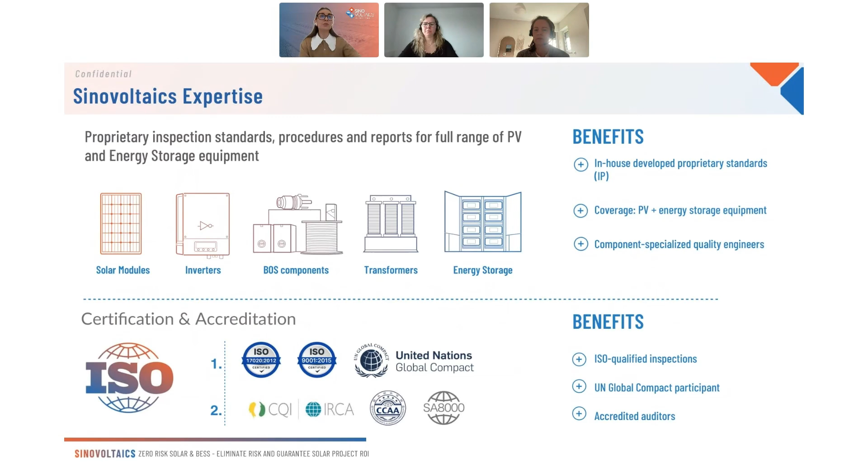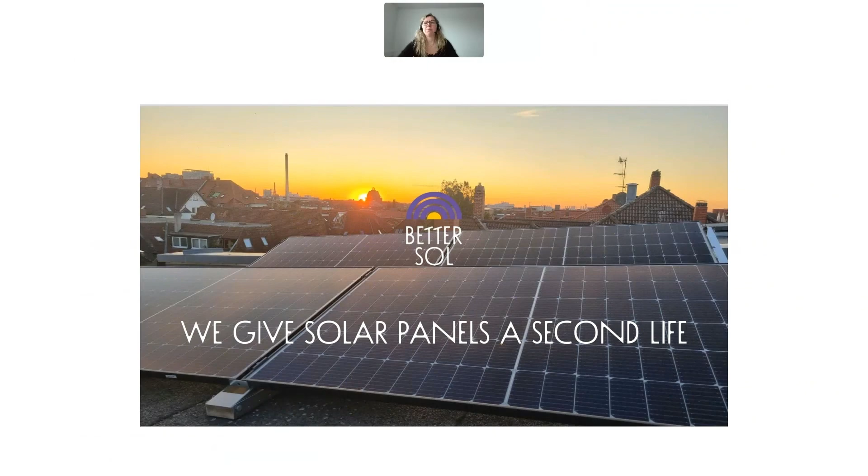Thank you very much. Hello, everyone. I'm delighted that you are here, and glad that I can share some information with you about Second Life. Even though I can't see you, I'm looking forward to seeing you.

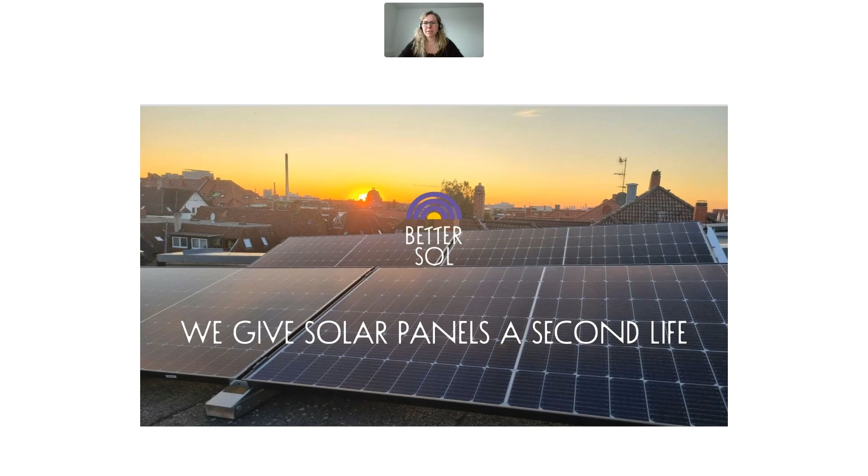My name is Franziska Ruff, and today I'm standing here for my colleague Luisa Schulze, who is responsible for the Better Sol brand and consequently the Second Life division at Solar Materials.

The energy transition is fully in swing, and the expansion of solar energy is growing exponentially. We all need this trend to create a future-proof world.

But what happens to solar panels at the end of their lifespan, or once the subsidy has expired? Solar Materials offers the solution here and closes the loop.

Decommissioned modules are sent to us in Magdeburg, where we inspect the solar modules disposed of by commercial operators. This allows us to separate functional solar modules from defective ones. Whilst defective modules are sent for recycling, we resell the functional ones as Second Life modules via our own online shop.

You might be surprised to learn that one in two solar panels is disposed of prematurely. According to studies by Irena and Circularity, half of the solar panels that are disposed of are actually still in working order and can be reused following an inspection or minor repairs.

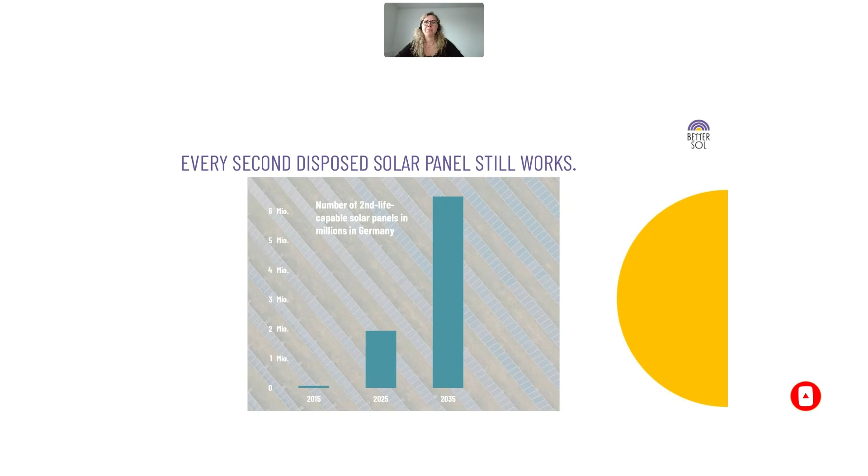At Better Sol, we aim to save still functional solar panels and the renewable energy they generate from premature disposal, thereby combining two essential drivers of the future: the circular economy and renewable energy.

In principle, all modules are suitable for testing, provided there are no known faults, such as glass breakage or defects on the backsheets. Any modules not suitable for reuse are recycled by Solar Materials, thereby recovering all valuable raw materials. My colleague Janet will tell you more about this in a moment.

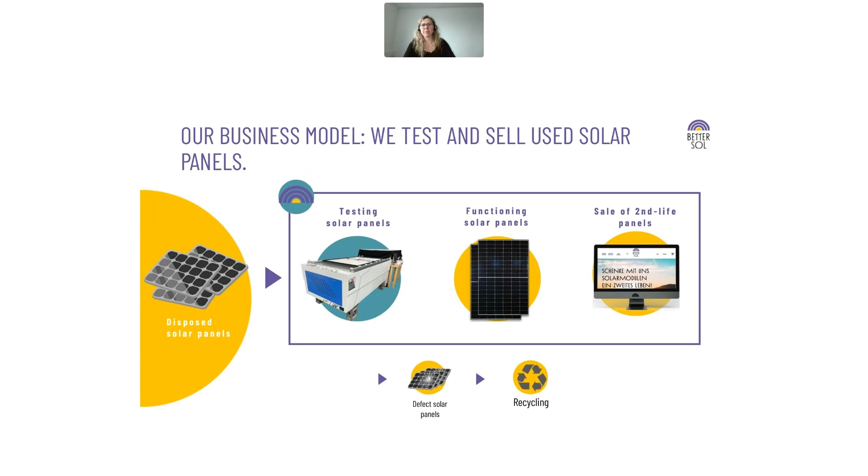We work with various recycling companies, solar farm operators, and resellers to purchase used solar modules. These companies work with us because, for the first time, they receive a refund for their still functional solar modules and thus avoid the recycling fee for such modules.

We collaborate with recyclers, IPPs, manufacturers, and resellers of new modules. Recyclers such as Reiling in Germany are delighted to be able to generate revenue from what was considered waste.

These companies work with us because, for the first time, they receive a refund for the solar panels that are still in working order, thereby avoiding the recycling fee for all such panels. Perhaps we will soon be able to turn the waste into a positive return as well.

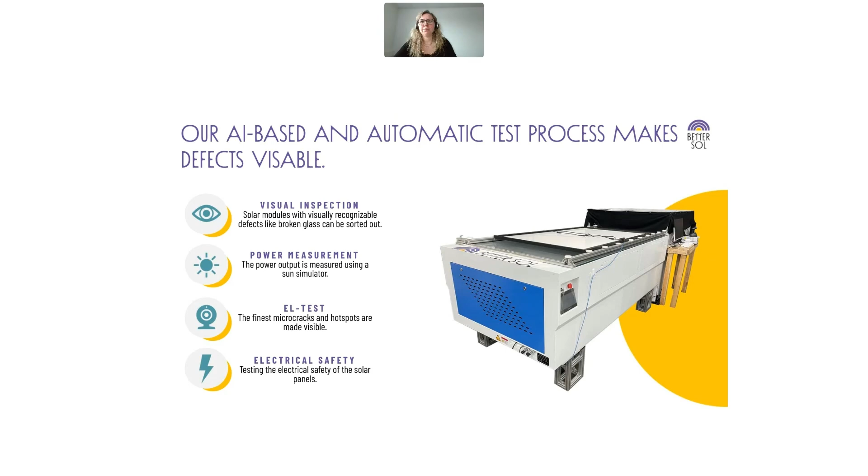Once inspected, our second life modules are sold via our online shop to B2B and B2C customers. Our modules are 30% cheaper than new modules offering the same performance. They are sold under the Better Sol brand, which is dedicated to selling inspected high-quality second life modules.

By reusing solar modules, we can offer a comprehensive end-of-life management service for used solar modules, comprising both recycling and reuse. Through reuse, we close the loop and act in accordance with the waste hierarchy. Critical and finite resources, such as silicon and silver in the solar modules, can thus be reused and are not lost.

Reuse can save more than 160 kilograms of CO2 equivalents per module. I hope these benefits impress you as much as they have impressed me.

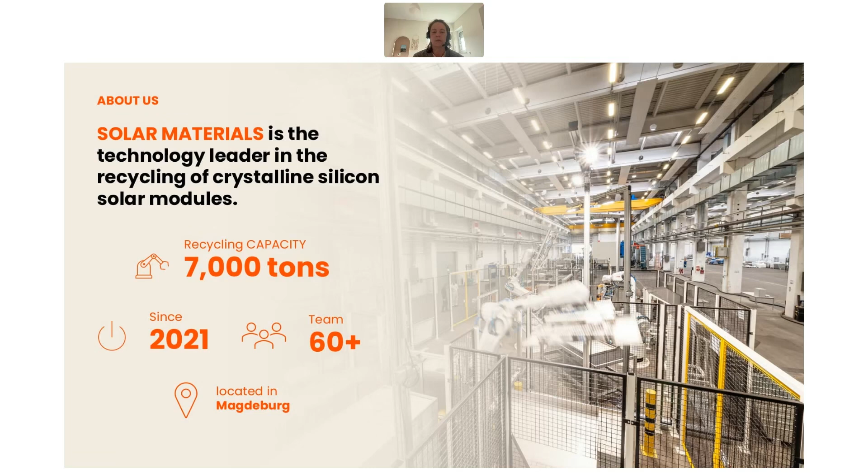We are now over 60 employees, and our capacity for the last year was 7,000 tons of PV modules we recycled. So we still grow. This is just the beginning of the Solar Materials recycling story.

So what kind of material do we recycle? Of course, PV modules. I think everyone is familiar with the typical layers of the module. The interesting fact is that around 95% of the installed modules right now are crystalline silicon solar modules. And how were they recycled up to now?

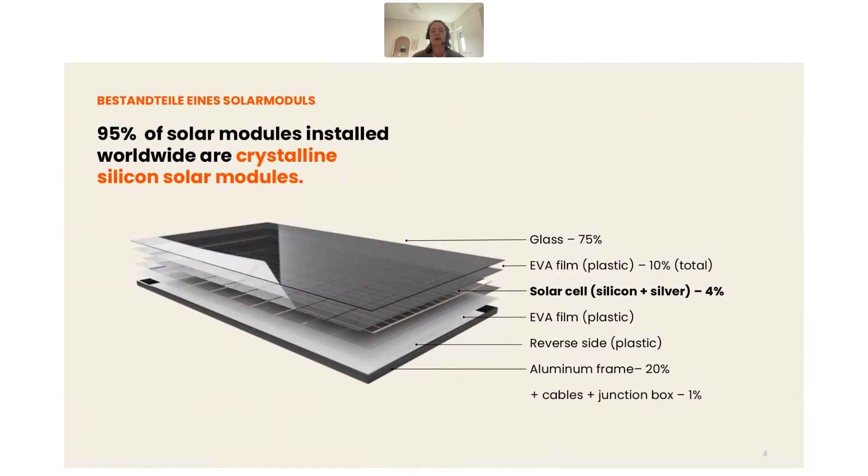Most of the panels were recycled by shredding and sorting. This is pretty much okay, because with shredding and sorting, and afterwards having the glass as well as the aluminium fraction, you have recycled 80% of the module, which is directed by law, so everything is fine. But what I want to address during this presentation is that one can do it better.

Here you see a nice graphic of how many modules we will receive until 2030. You see there's an annual growth of the installed waste volume, and it grows really fast within the next years. This means we have millions of tons of installed PV modules, and they contain billions of euros when you think of the materials which are inside of the PV modules.

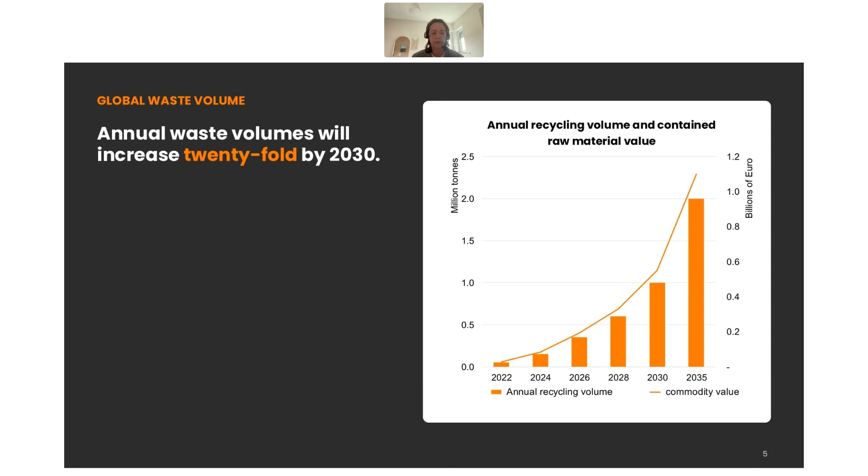So for us as a recycler, we live in the past, so to say. We always live 10 to 15 years behind the production. This means right now it is typical that we receive the modules after 10 years of being in the field. So this is what we get now.

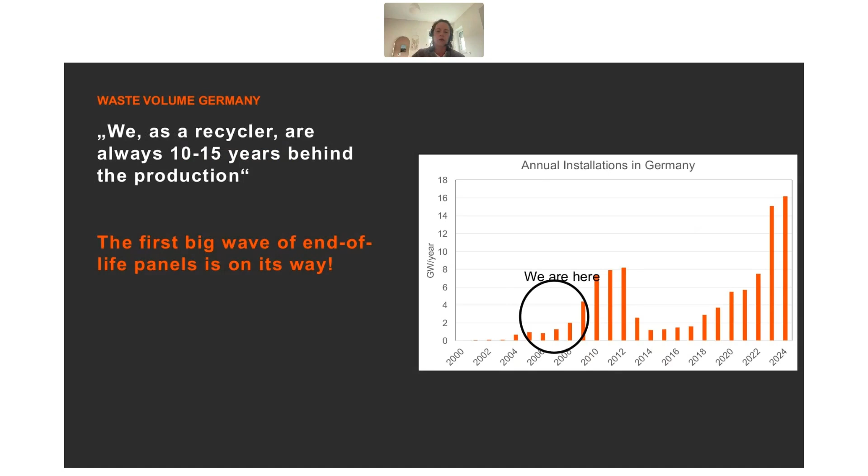So we are now at 2006, 2008, and you see the amount of installed PV modules which come back now to us is high, but you see that within the next years it will be much higher. So this is the point where we are now, that we need recycling capacities to get back all the critical raw materials which are inside of the modules.

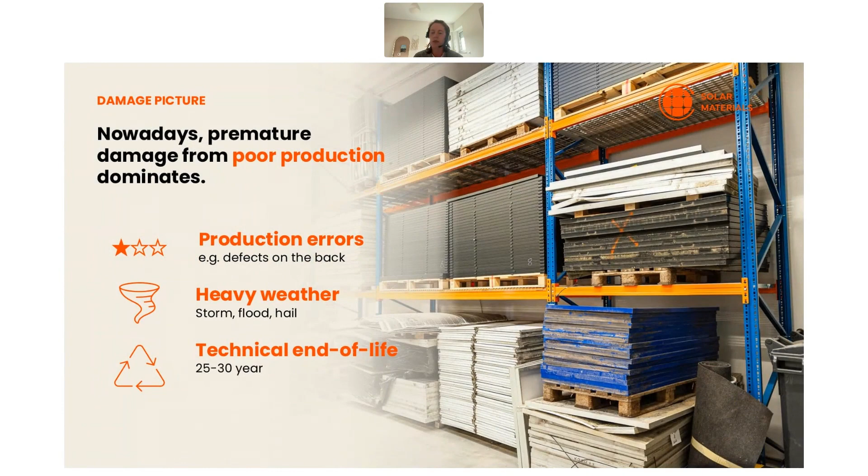So what kind of modules do we receive at our facility? We receive production error modules, damaged modules by hail, by storm, by all kinds of things, dirty modules which don't have a good fit anymore, and as well the end of life modules, with a lifespan of 25 to 30 years, but most of the time, due to the repowering of the parks, they come back earlier at 15 years. They are at the end of their life. So this is what we receive from big solar parks, which are mostly in good condition.

And we also receive modules from local points. This is a little bit, I don't know how to say, there are many different modules. This is not so easy for us.

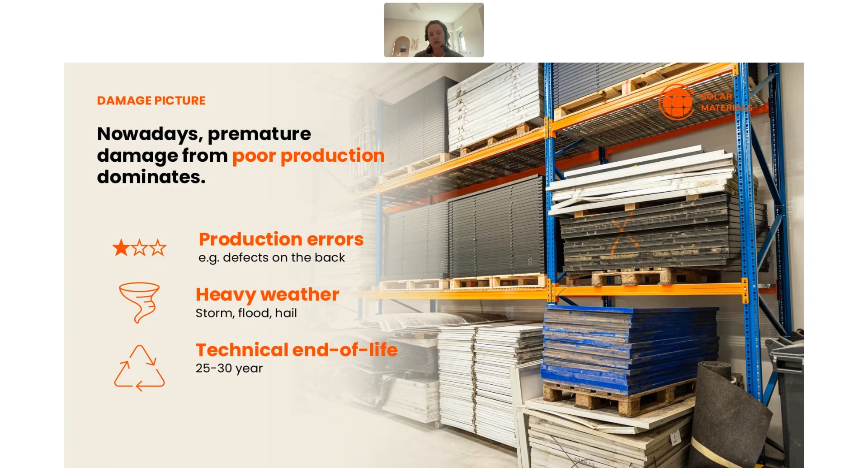This is easy when you shred and sort it at the end, but we do it a little bit better. So I will come to this point now.

The problem is, when everyone gets back these modules and wants to recycle them, you get back the aluminium frame, which is pretty easy, and you can recover the glass, which is also well understood right now. But silicon and silver are most of the time lost.

The recovery rate is nearly zero for silver and silicon, but around 10% of the annual silver production is used in the solar industry. So you can imagine that it's a lot of material which is gone at the end of the day. That's why we asked ourselves different questions.

How can we efficiently recover the silver? How can we increase the purity of the recovered silicon? And what can we do with the tons of recovered plastic? How can we do it safely? What kind of modules do we expect within the next years? And how can we establish the capacities for recycling?

So the first question is, how can we efficiently recover silver? The fundamental thing when you want to recover silver is, of course, you can't just shred and sort it at the end. You know that around just 1%, or a little bit less than 1%, of the weight mass of the module is silver. So when you think of a big shredder where all the stuff is put in, how can you get back that 1%? It really doesn't work.

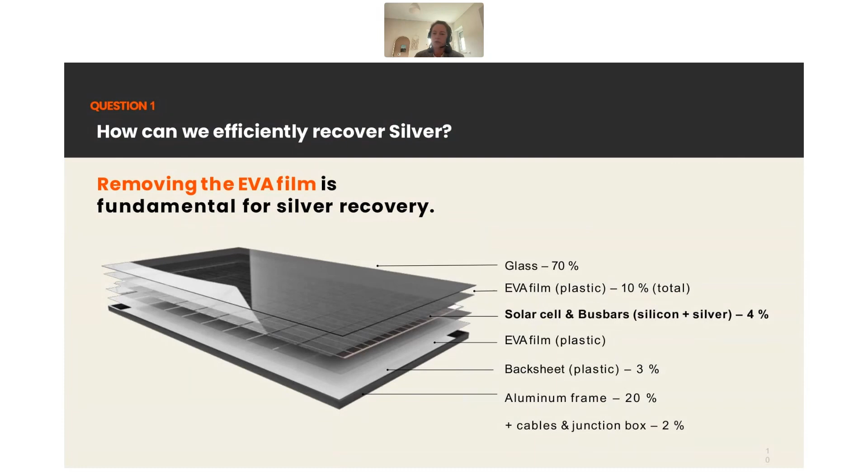So the thing is, you have to get access to the surface of the wafer, and for that reason you have to get rid of the encapsulant. This is not so easy, as I already told, and there are different ways to do that.

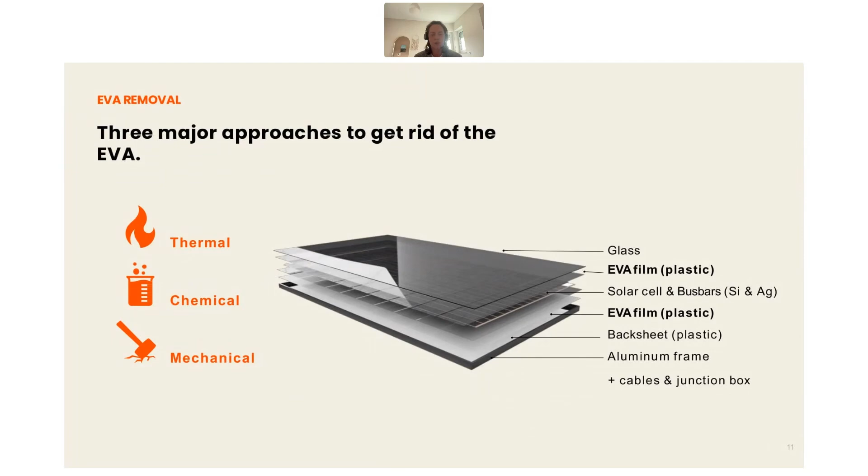You can use a thermal way, you can also use a chemical way, or you can use a mechanical way. But yes, at every time, no advantage without disadvantage. Here is a little overview of some advantages and disadvantages of different techniques.

For that reason, Solar Materials tries to get a simple and completely new way to recycle the PV modules. We don't use any chemicals at the moment. We only work in a thermomechanical way.

This means when you don't use any chemicals, or don't have pyrolysis or something else, you can really scale it up well. You have pretty low investment costs, a relatively high throughput, and the best thing is, as I told before, that we don't shred and sort at the end.

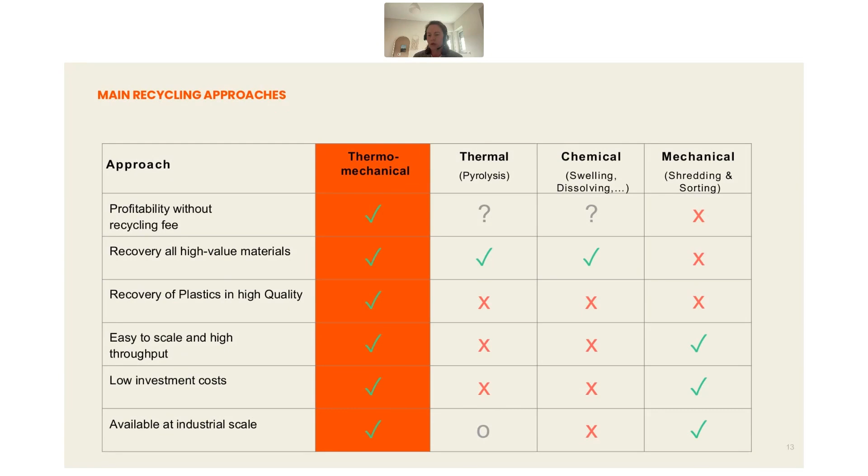We just do a delamination of every single layer, so we can recover all high value materials. We can also recover plastic materials, and it's all the time profitable without a recycling fee. So this is a pretty big advantage.

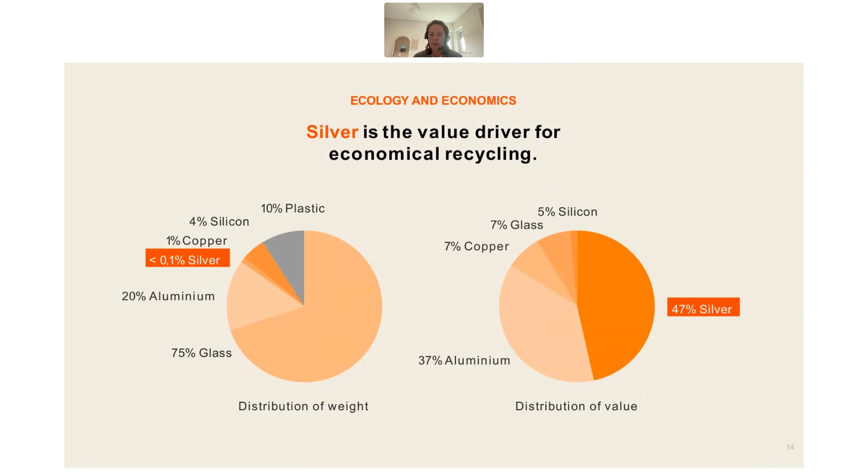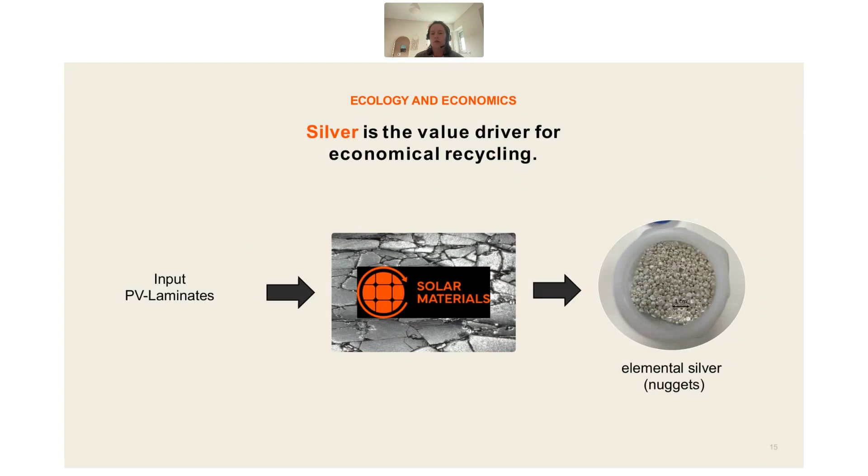You can say that there are around about 10 grams at the moment per module of silver, and we are able to recover 8 to 9 grams of it. So the process works pretty well.

I see some questions rising, but I will go on and we'll have it later in the Q&A. So, how can we efficiently recover the silver? With our own process, we can do it pretty efficiently and in a pretty good quality.

Next question is, how can we increase the purity of the recovered silicon? This is a bigger issue currently. The status quo of the recovered silicon is really good, but not really good. We have a silicon metal fraction with a purity higher than 95%, around about 96% I would say. We also have impurities like silver, aluminium and tin, as well as lead and other metals which are in the module.

The usage of that stuff is a little bit critical right now. So due to the high impurities, it is not even usable right now as technical silicon. You can only use it in non-ferrous alloys currently.

The target is we want to upgrade it to solar grade, which is 6N. I'm not pretty sure if it's necessary. Currently there's really no need for silicon here in Germany especially. Nobody really wants to buy it. So it is as well pretty cheap currently. I don't know if there's a big need to purify it to that grade.

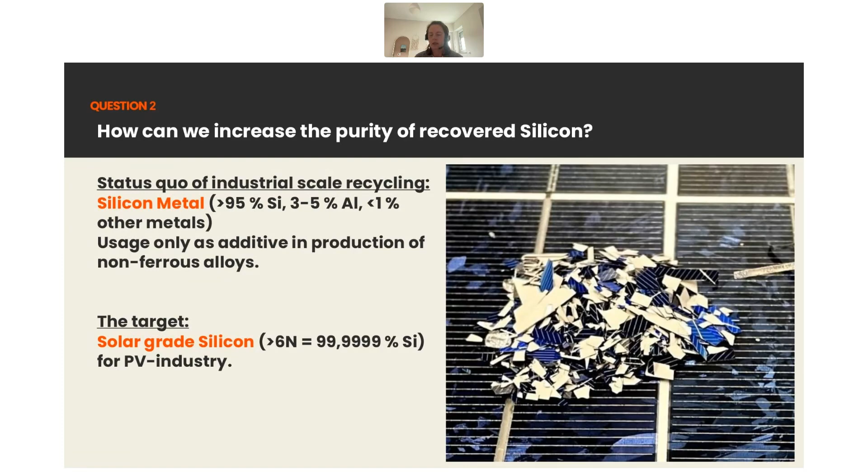6N grade, maybe 4N grade would be also fine. But this is a big issue currently, and nobody is really aware of how the story is ending, what kind of quality we want to achieve at the end. So we can say that we are able to recycle the silicon in the quality I told you, around about 96% purity, but the rest is still open right now.

So something about the improvement of the quality. What can we improve as a recycler? We could improve our recycling process. We could delaminate the silver a little bit better, because we still have rests on the wafer at the end. So this would be something that works.

Also, you could better separate all the impurities before you shred the silicon. As well, you could prevent external contamination, like abrasion from the machines or something like that. These are tasks for us as a recycler.

Then something would solve itself, because within the next year we will receive PV modules with different ingredients, so to say, like the PERC cells, like the TOPCon cells. So then the story is really another one. But most likely, with a real recycling process, you can't achieve a really pure silicon at the end. Most likely we need to involve some wet chemical processes.

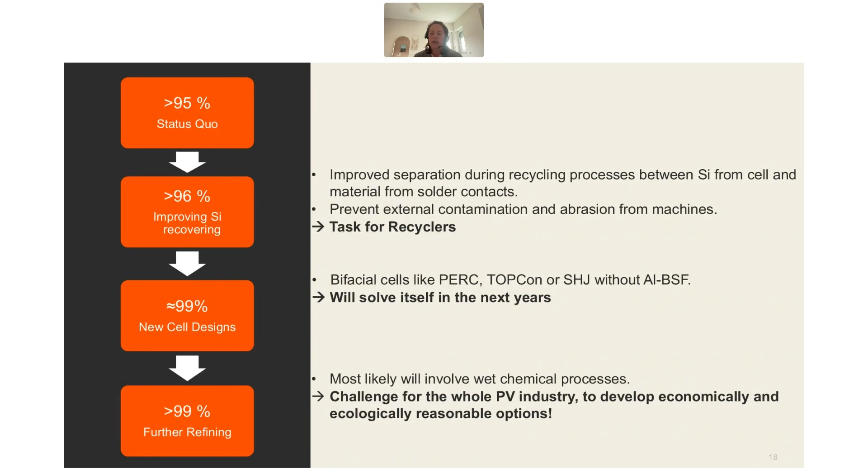But I don't think that this is a task for the recyclers at the moment. So without any chemical treatment, you won't get a really pure silicon at the end. This is really a challenge for all of us, for the recyclers, for the chemical industry, and everyone who feels addressed.

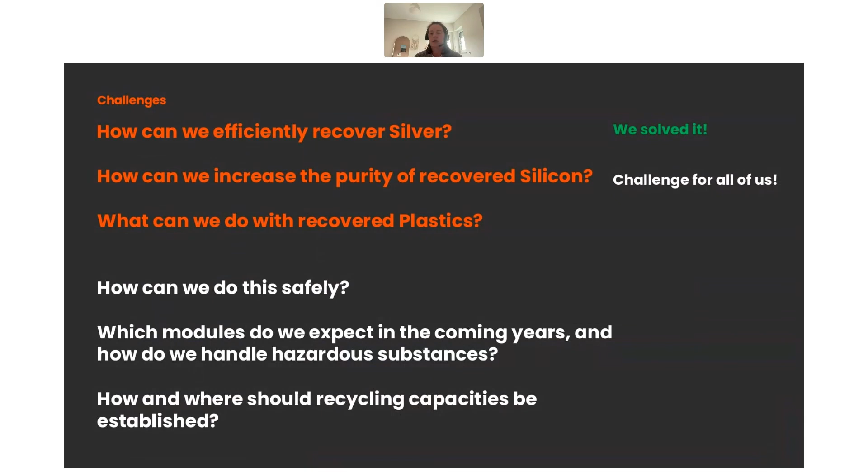And then another issue I want to address, because we are faced with it every day: what can we do with the recovered plastic? We can recover plastic in high quality. As I said, we delaminate all the layers of the PV module, and at the end we also delaminate the EVA encapsulant as well as the backsheet.

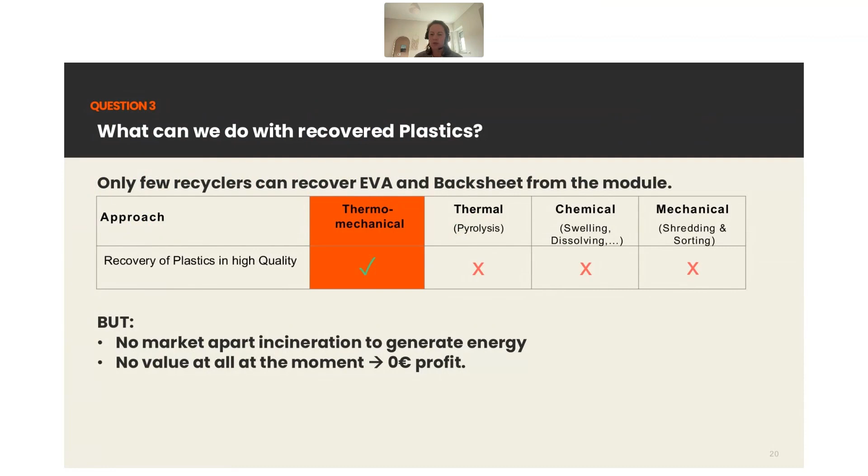But currently there is no market for the plastic fraction. We have some research projects where people try to reuse it in different applications, but currently most of the stuff is going to incineration and generating energy. This is really non-profitable at the moment because we sometimes have to pay for it. So this is a question I address also to you as the auditorium. If you have any idea what to do with the recovered plastic, please feel free to reach out and give me some hints.

Yes, because plastic offers some things that are not so good. All the time we're faced with unknown variations in the material composition, because 20 years ago nobody thought about the recycling process at the end. So there are no specs for the material. Everyone used an EVA layer, but what kind of additives, what kind of stabilizers, all those things are pretty unknown. So due to their lifespan, they come to us with different physical and chemical properties.

Some of them, as an extreme example, were installed in Africa, and some in Germany where not so much sun is shining. So this directly affects the chemical properties of the plastic materials. We also have contaminations with glass, metals, and silicon. And the big problem is the fluorine content in the backsheets especially.

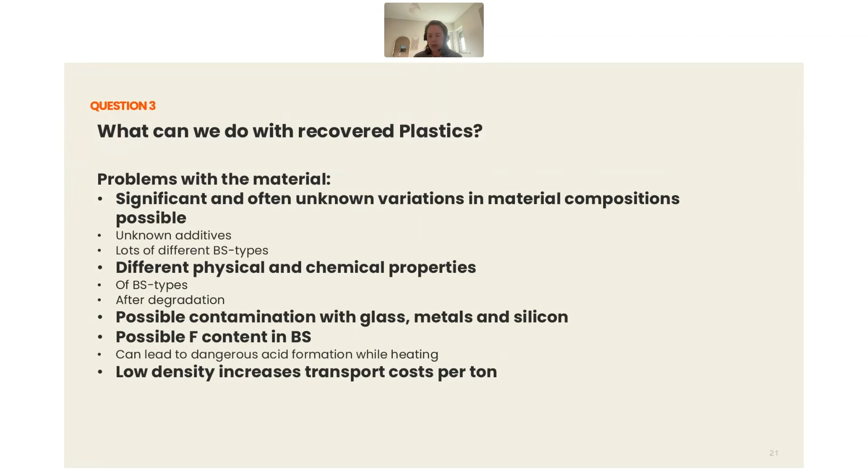And of course transport costs are also an issue, because we have pretty low densities. So if you have any idea, please feel free to reach out.

Another point is, how can we do this safely, this recycling of the PV modules? We learned a lot during the last years about how we handle all the hazardous materials and all the stuff. What I want to address today to make it safer is, of course, compliance with standards.

Standards are given right now, but I think there's a lot of space to make them better. As well, I think it's pretty much good if you have automated dismantling, so if you use robotics to minimize the manual handling as well as the risk of accident.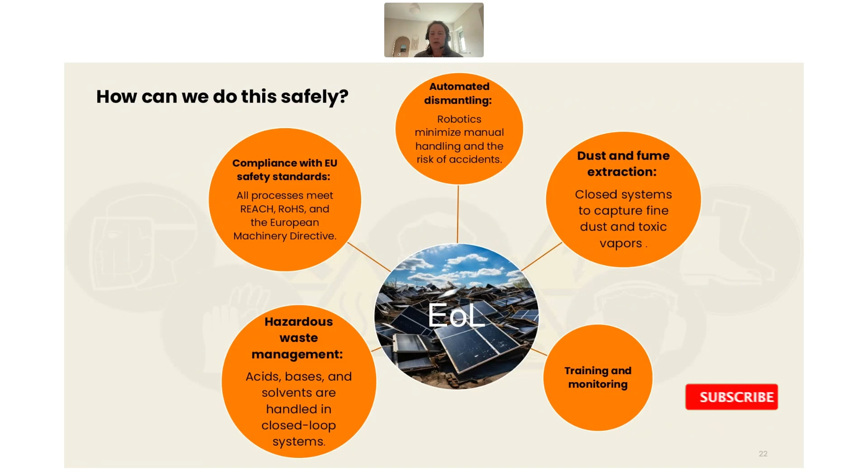And a big point is dust and fume extraction. When you imagine that tons of modules are shredded, you can imagine that this is a really, really dirty business. In our process, the delamination is a little bit better.

But we are also faced with hazardous materials within the module. This is lead, which is pretty not good for the workers in the facilities, tin, also not fine, and powder materials of silicon. You can imagine that this is pretty much hazardous for all the persons who are dealing with it.

And when you imagine all of the capacities we are working with, this is not one module per day or two, these are tons of modules during the year. So we have to find something which makes the recycling process much cleaner than it is today.

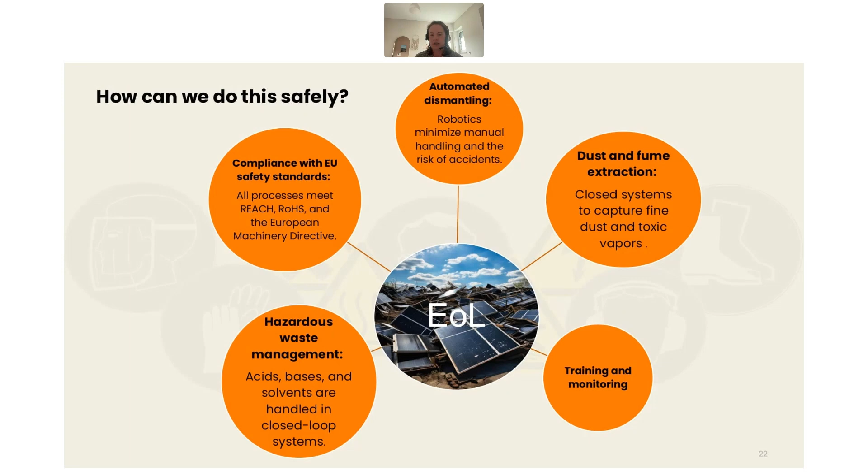Training and monitoring is also quite important. So which modules do we expect in the coming years? I think you are all familiar with the new types of modules which will arrive, like perovskite cells as well as thin layer modules.

New technologies emerged, and then we also have to handle it during the recycling process. This means when you think of the crystalline silicon modules, they are pretty easy - they just have the wafer and the silver, and of course lead and something like that is also in it. But then you have the glass and the encapsulant.

But you see here, you are faced with, especially with the thin layer modules, cadmium, tellurium, all the stuff. So recycling will become more hazardous for that kind of materials as well. You can't easily recycle that small amount of contaminants or ingredients which are in the module. This is also something which gives us strong headwind currently in our R&D development.

Then you have the regulatory things which should impose stricter producer responsibilities. They should provide the bill of materials for the recyclers, because the business is pretty much easier when you know what you are dealing with. Then we could work a little bit more on our safety conditions.

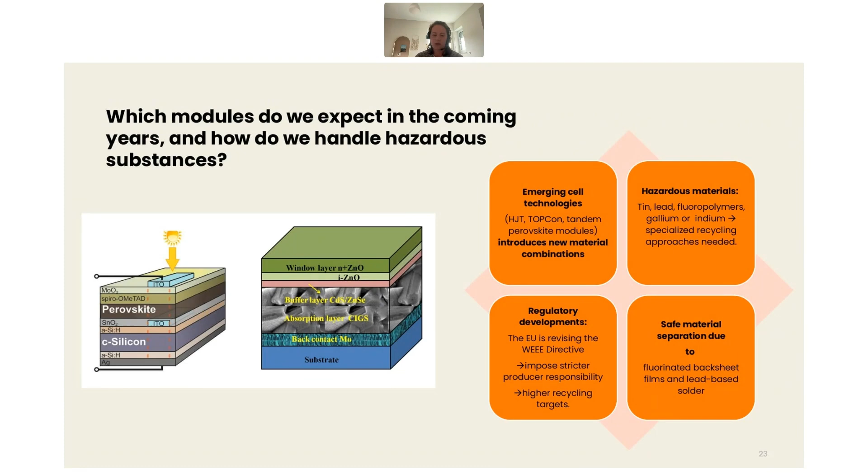Something about the recycling capacities - we are thinking about how can we establish good recycling capabilities. Everything is more or less installed decentralized, so maybe it's easier to install some regional plants to minimize the logistic costs as well as CO2 emissions. Logistic costs are a pretty big pain at the moment. We all know the costs for fuel are pretty high, so this is a big pain currently for us, especially when we receive modules from far away. So I think for the future it's pretty smart to have a decentralized network as well.

Some integration of collecting systems is also possible, so that you have an efficient material flow. The policy should be involved, and some industrial clustering would also be fine, because then you don't have that logistic cost at the end of the recycling. When you sell the materials, maybe you should locate your recycling facility in the vicinity of glass processors, refiners, and all that. This could work well if everyone thinks about how to do it a little smarter, how to save logistic costs and all this stuff.

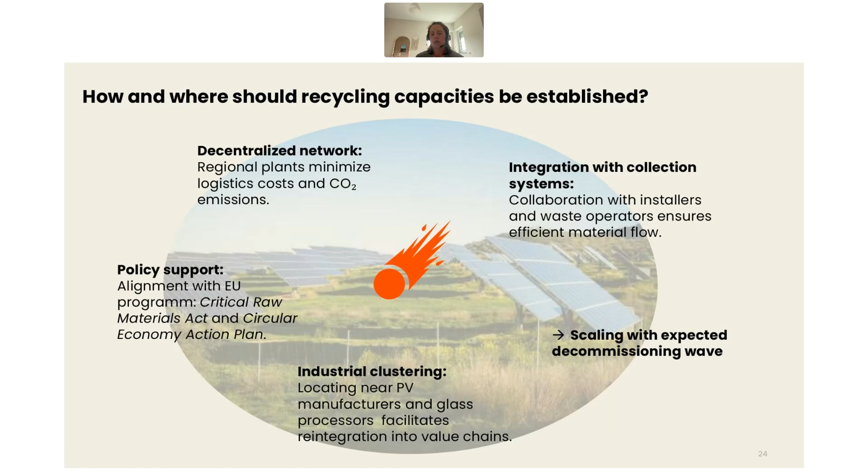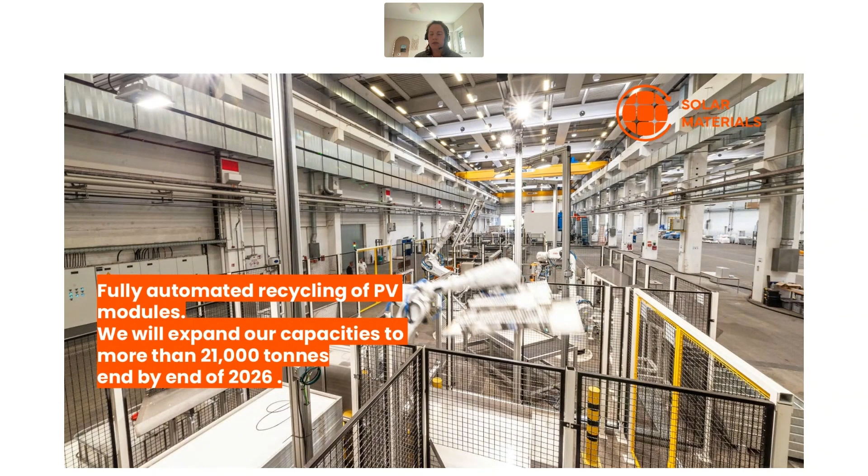So there's a lot to do within the next year, as we scale up our recycling plants and face the expected big decommissioning wave. A little sneak peek here from our facility - this is a view of one of our recycling lines, which is fully automated. We will expand within this year to a recycling amount of 21,000 tons. By the end of the year, this means we scale up to 3 fully automated operation lines.

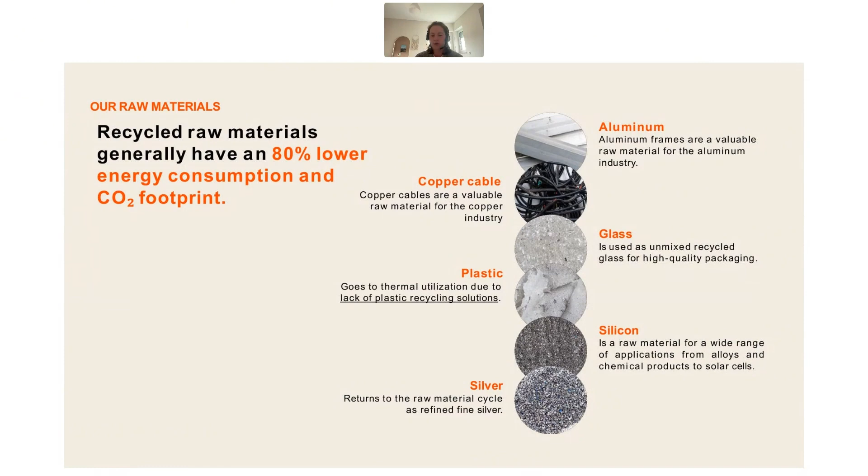The materials we sell after the recycling process, as I mentioned before, are the aluminium frame, the copper cables, the glass - currently in a flat glass quality, so pretty good glass - the plastics, where we don't know what to do with currently, and the silicon. I addressed a bit the quality of the silicon, which is a point to work on, and the silver, which then goes to refinery and ends up as elemental silver.

With that point, I'm at the end of my presentation, and thank you for listening.

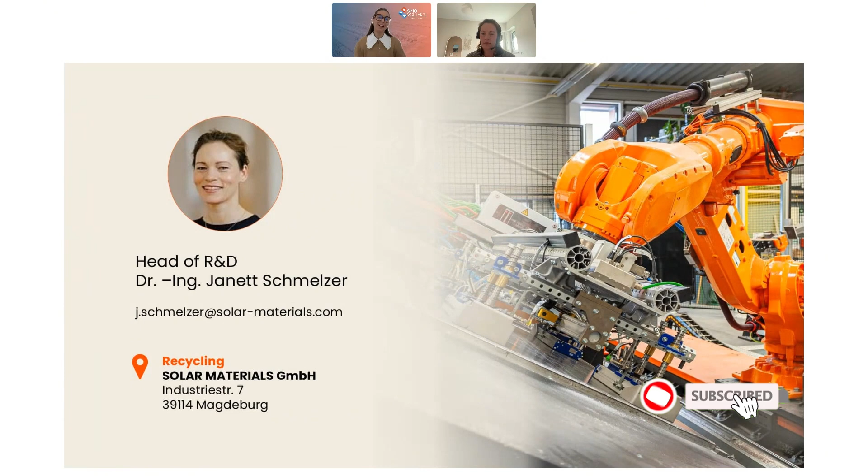So now we know how we can reuse modules that are still operating, and what we can recycle from modules, or what we don't yet know what to do with among the recycled materials, like plastic. Let me quickly present the key drivers of PV module degradation and how you can prevent this before commissioning. In the intro of this webinar, I already cited the recent University of New South Wales study that analyzed nearly 11,000 PV modules globally and found that 1 in 5 modules degrades at least 1.5 times faster than expected, and roughly 1 in 12 degrades twice as fast. For some systems, useful life shrinks to just 11 years, with 45% of output lost by year 25. The researchers identified 3 causes: cascading compound failures, infant mortality from manufacturing defects missed in quality control, and latent minor flaws that seem harmless at first until they don't. Critically, climate is not a driver - these failures happen everywhere.

So what are those flaws? Let's look at some of the most impactful that we see in our work. Microcracks are the most pervasive hidden defects in the industry. According to National Renewable Energy Laboratory research in the US, 84% of PV modules contain at least one cell crack, and most are invisible to the naked eye. Many originate during manufacturing at the cut edge, then grow into dendritic cracks during transportation and installation. Under thermal cycling and mechanical load in the field, they propagate, blocking cell areas, triggering hotspots, and opening pathways for moisture ingress.

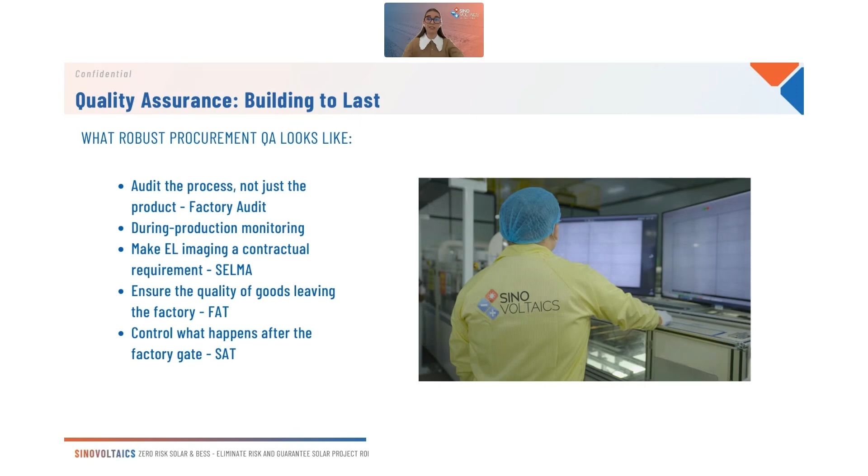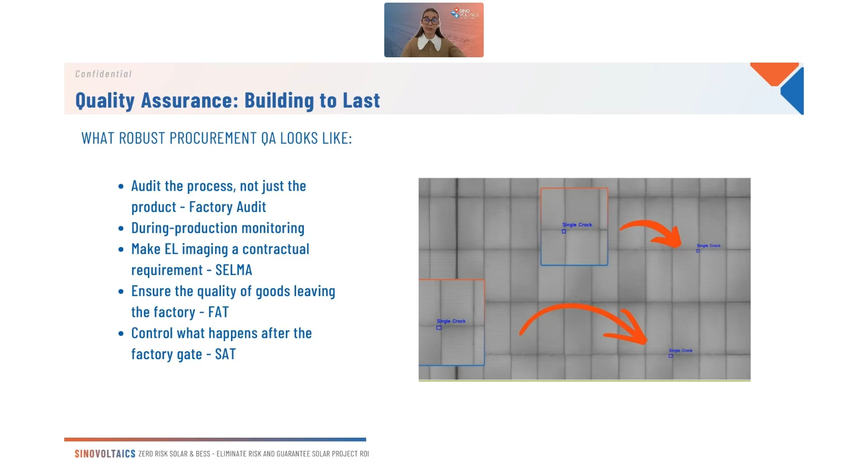So, the conclusion: the modules you procure today determine whether your assets can be repaired, reused, or must be recycled in 10 or 15 years. You need to move your quality assurance upstream, not downstream.